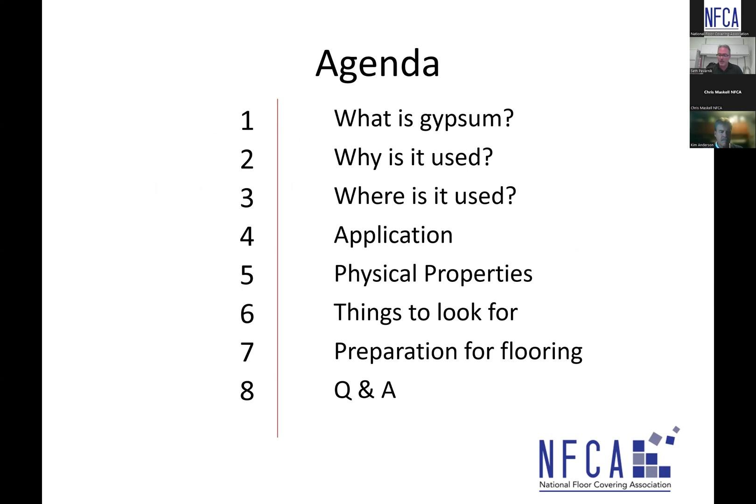And in this presentation, we're going to take a look at gypsum and detail what it is. We'll try not to get too technical there, but we'll also look at why it's used and where it's used. We'll look at the application and then get into its physical properties. Ultimately, things to look for out on site and in preparation for finished flooring, and then we'll wrap things up with a little Q&A session afterwards for anybody that has any questions in relation to what was discussed today.

So to kick things off, what is gypsum? So the chemical name is calcium sulfate. And there's many types of calcium sulfate. So, I mean, if you look on an SDS, a safety data sheet, and you see one of the constituents of a product and it says calcium sulfate, that is gypsum as we know it.

There are different types, and I want to share some of this with you, not to get real technical and have you learn the different types of gypsum that's out there, but it is a true chemistry when it comes down to it. We have calcium sulfate dihydrate. This is natural gypsum. We have calcium sulfate anhydrate. That's also natural gypsum. It's very common for natural gypsum to be found in the earth, typically next to limestone as a part of the reaction that's happening inside the earth.

We have calcium sulfate semihydrate, and this is a little bit different. We're basically creating this by taking standard calcium sulfate, half of a water molecule, and putting it in an autoclave with crazy temperatures, crazy pressures, and humidity to create a different type of gypsum to have different properties.

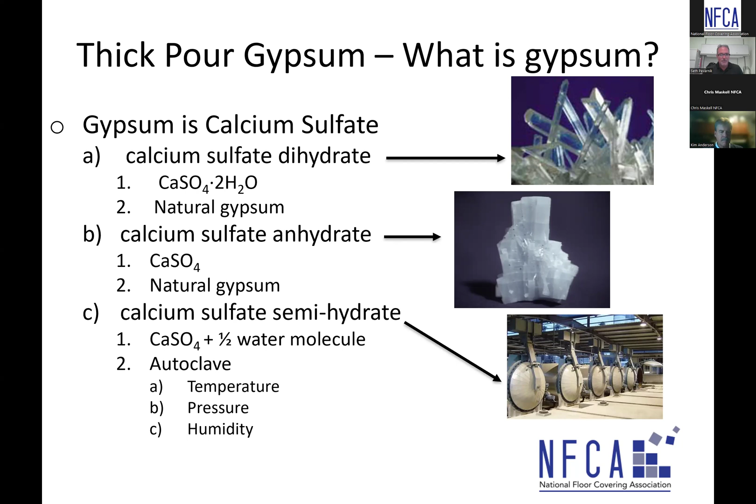And then on the other hand, while those are all natural type gypsum products, we have the synthetic type gypsum products. Could be a function of manufacturing hydrofluoric acid. The calcium sulfate in this process is a byproduct of the manufacturing of hydrofluoric acid. The burning of coal in power plants, flue gas desulfurization, that process, a byproduct of burning coal and the flue gas desulfurization creates a gypsum material. And both of these would be considered synthetic gypsum materials. So a variety of different types of gypsum out there in the industry, from natural, found in the earth, and manufactured, as well as byproduct type materials, as you see here.

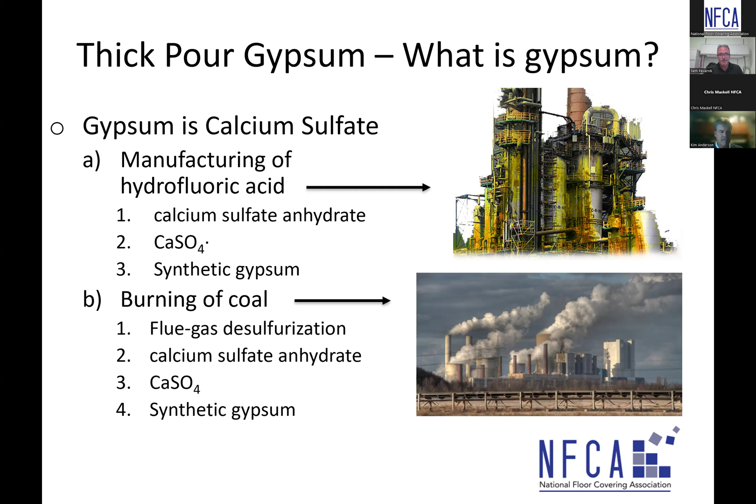So what is gypsum? I mean, the first thing I want to say is it does get a bad rap. Unfortunately, there's been some bad floors that have been poured over the years that don't have very good integrity, and everybody associates gypsum for the most part as being a weak type material. So, in my opinion, it's true that it gets a bad rap. I want to talk to you a little bit about why it gets a bad rap as well.

But a couple of things here. It gets a bad rap, number one, where it's used. Gypsum is supposed to be above grade applications. If it gets used on grade, where we're subject to ground moisture, it can deteriorate and gets a bad rap because of that. How it's used, maybe used outside of its recommendations. You end up having an end result that's not good, used outside of its own specifications, could create a negative result, getting a bad rap.

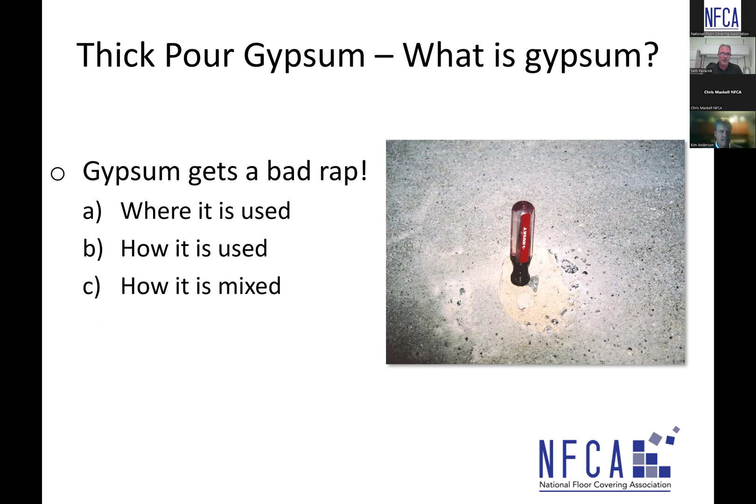And lastly, and most commonly, it's how it's mixed. It can tend to be mixed with too much sand, mixed with too much water, and the end result is a product that may not have good integrity. And also mixed under the wrong indoor environmental conditions.

Very, very good point, Chris. Absolutely. And a lot of water in gypsum - we've got to have good drying properties within the space for installation. And in a lot of cases, it gets installed in the early part of a project and it's open to the outside elements that can be contributing factors as well.

We had a project where propane heat was being used, creating a very moist, humid environment. And the gypsum got poured and the windows were left shut. And the whole thing failed. I'm not an expert in gypsum, but the ingredients separated as a result. Is that how you would see it?

Yeah, it certainly is. And that's one of my talking points here today, one of the biggest causes of issues - it'll be in a future slide - is the GC closing up the building, closing up the area, and all the moisture gets into the air, and you're basically creating a greenhouse effect going on.

We've got to have proper drying happening, and gypsum takes some time to dry. It's typically a week for floor covering, at least from a drying standpoint, and your conditions could mean a longer time than that. That particular case was 50,000 feet, and it was literally just crumbling, chunks of it coming up. Horrible situation.

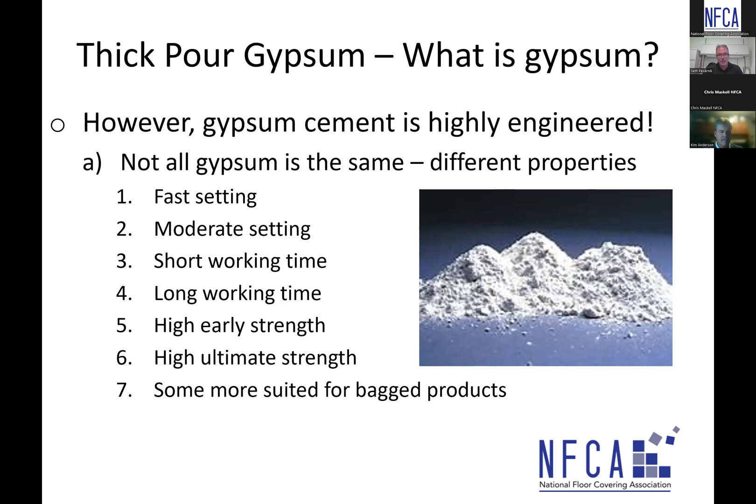So when you really talk to the chemist, the R&D chemist, when they're designing a product, they've got to detail what they want that product to achieve, and then they start with a handful of different types of gypsum materials based on what they need out of that product that they're designing.

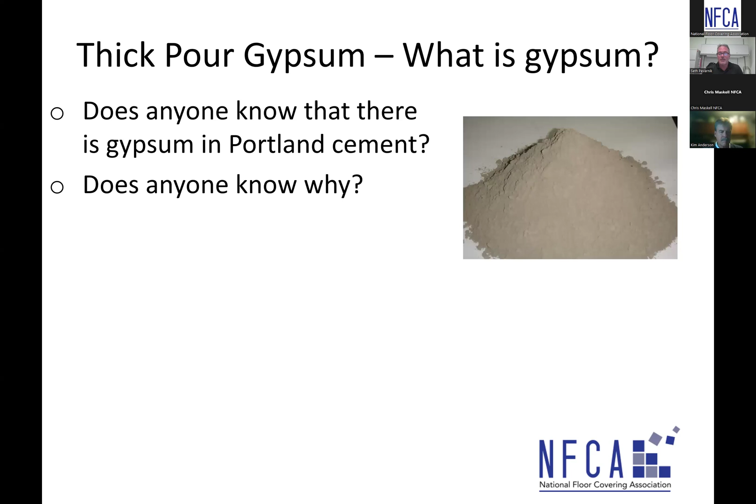Does anybody know that there is gypsum in Portland cement? Well, there is. We do now. And the reason that it's in there is to regulate set. So there's a small amount of gypsum in Portland cement, and it's to help regulate set, make a consistent set.

A little piece of trivia for you guys - gypsum is also a part of hydraulic cement formulation. So the industry definition of hydraulic cement is basically something that is mixed with water, curing chemically, and it has the ability to set underwater.

So your patching and leveling materials out there that are used to prepare floors for finished flooring are qualified as hydraulic cements. I'm not saying you're supposed to use them in underwater applications, but by definition, if they can chemically react and set underwater, then they're called a hydraulic cement.

All these products are hydraulic cements, and it's typical for a small amount of gypsum to be used in these hydraulic cement formulations. You might have a Portland cement material or calcium aluminate cement material as the main binder, and there might be - you look at an SDS and you may see a small amount of calcium sulfate in there. It's not necessarily a filler, but it's a part of the chemistry of the cement.

And that's where the R&D chemists come into play with taking different types of cement and making products. So just because you see calcium sulfate on an SDS, doesn't necessarily mean there's something negative about that product.

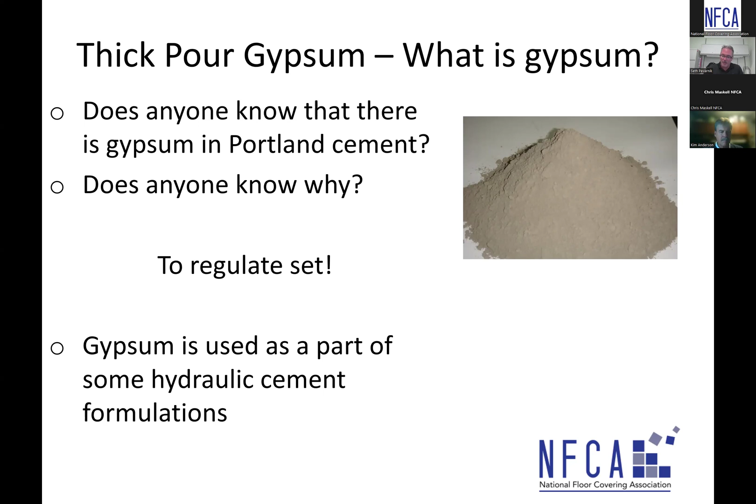So why is thick pour gypsum used? Number one, very commonly fire-rated assemblies. Similar to drywall - in drywall, gypsum wallboard as it's called is basically gypsum in between two pieces of paper. That type of material used on the floor is very good from a fire-rated standpoint.

Seth, what range of dimension is thick pour making reference to?

Like 1.5 to 2 inches? Not very common. Their minimum thickness for these thick pour gypsum products is very commonly 3/4 of an inch, so they will typically test at 3/4 of an inch as part of an assembly because that's their minimum thickness.

Well, the title of this presentation is thick pour gypsum, and thick doesn't quantify anything, does it? So what do you mean by thick? How thick?

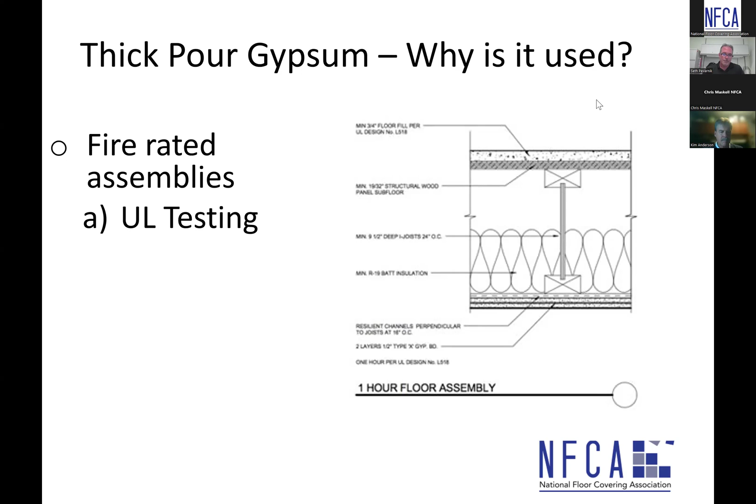Another reason thick pour gypsum is used is for acoustic and thermal insulation - sound reduction. In multi-family housing, a lot of times they have a membrane that goes down on the subfloor first, then an acoustical membrane, and then thick pour gypsum is installed over top at a minimum of 3/4 of an inch or greater. That sheer mass of product, along with the acoustic or thermal insulation membrane underneath, provides added sound and insulation properties.

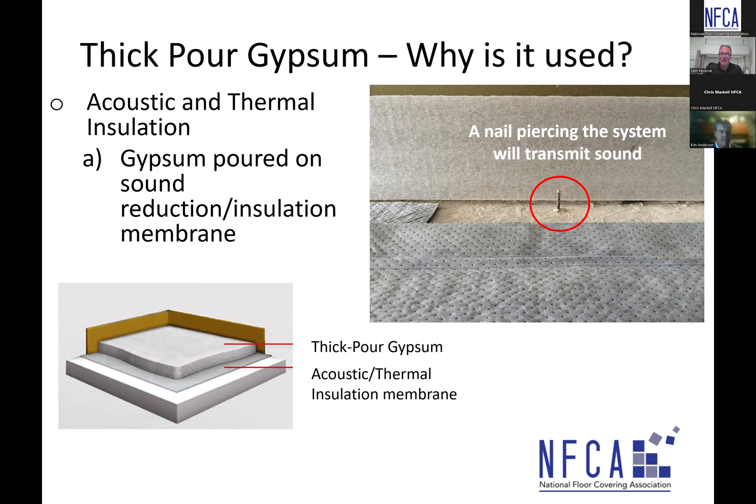Just something to point out here - don't know if anybody saw that in the picture, but this is a picture I found. We had a nail coming through the subfloor that was going to receive a thick pour gypsum application over top of an acoustic membrane. Just wanted to point out that that nail is going to transmit sound very well - not a good thing when it comes to sound.

Another thing thick pour gypsum is used for is in-floor hydronic tubing, where they install hydronic tubing on a wooden subfloor, very commonly - could be concrete, but very commonly wood. In this case, a membrane was installed first, then the hydronic tubing installed to the subfloor and tested, and then the thick pour gypsum is pumped in at a very thick application - thicker than 3/4 of an inch - because you've got to have massive material over top of those hydronic tubes. Another common application of thick pour gypsum.

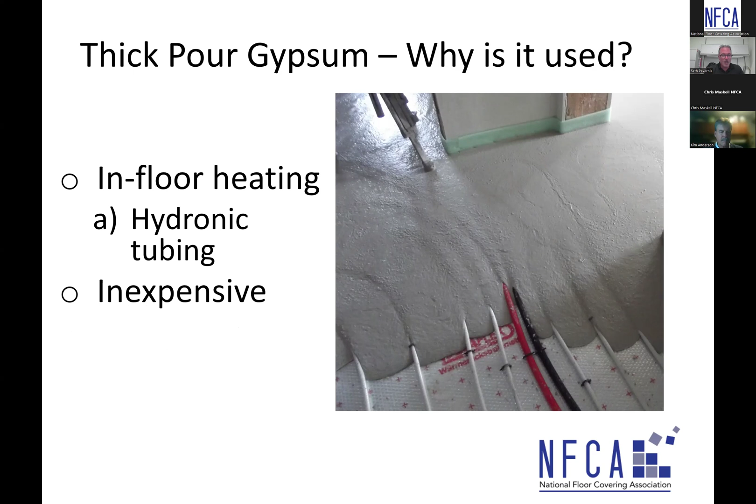Fairly cost effective for that application. Sorry about that, forgot I had that in the slide.

But let's take a look at where thick pour gypsum is used. A majority of the floors poured with thick pour gypsum are multifamily, multi-story living, typically wooden subfloors like you see in the picture. Approximately 70% of those installations are done with thick pour gypsum over wooden subfloor.

Another application you typically see would be precast plank. These planks are made at a manufacturing plant - called hollow core plank because they have hollow cores in the middle - but they're trucked to the job, installed, craned into place. Each plank, after it's dropped into place, typically has some sort of camber problem where one plank doesn't meet up perfectly with the other, and that difference they call camber. It requires some sort of self-leveling to be poured over the whole floor at greater depths to make a flat surface, and thick pour gypsum is one of the applications used for that.

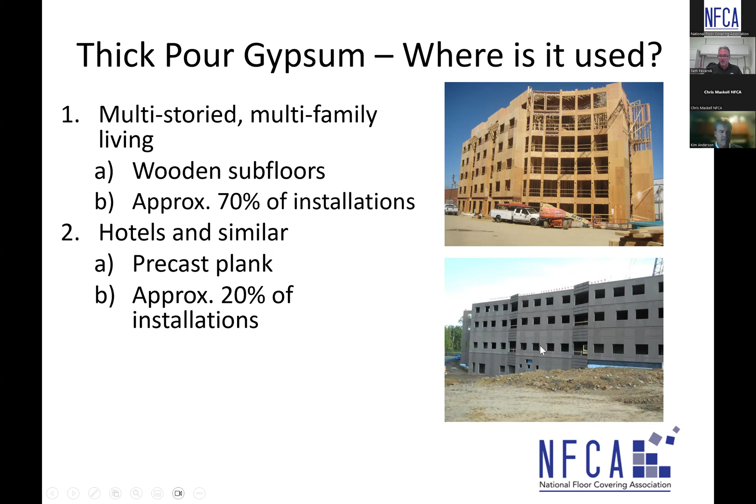Hotel applications use these hollow core planks and similar applications, and that's probably about 20% of the thick pour gypsum installed in North America. The last one would just be concrete and commercial construction, maybe just to round up to get to 100% - we're at about 10% of those installations, just over regular concrete as a leveling material.

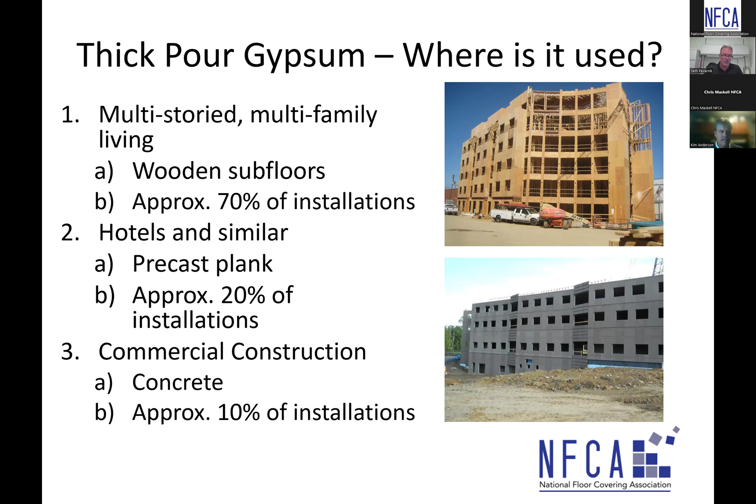So that kind of gives you an idea where they're commonly used, where we commonly see them.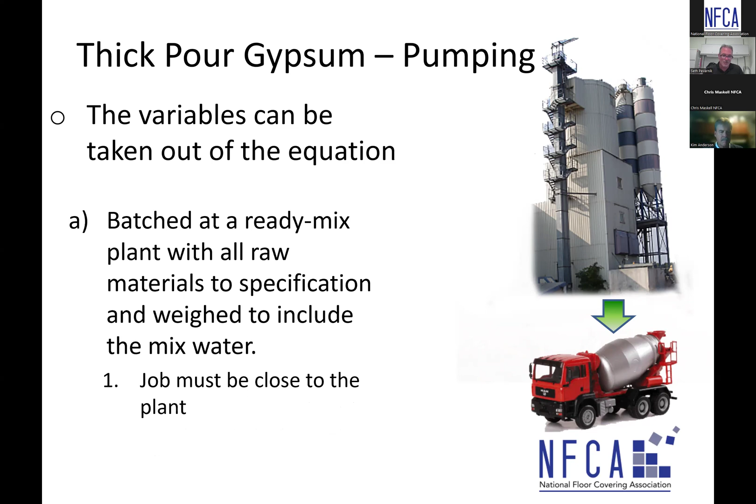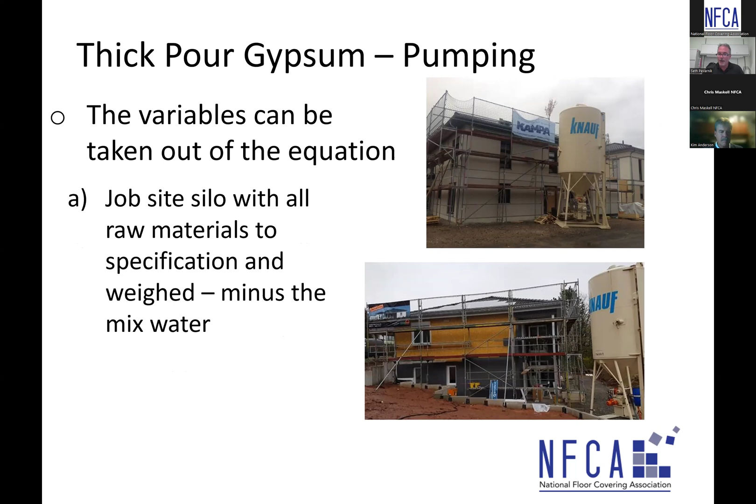So that's one way to take variables out. Another way is an on-site silo with raw materials weighed out to very specific weights, so we get the right ratios, the right amount of gypsum and the right amount of sand. Then that silo of properly blended sand and gypsum is placed into a hopper where the water is added, mixed, and taken to the site. That's another option to take variables out of the equation.

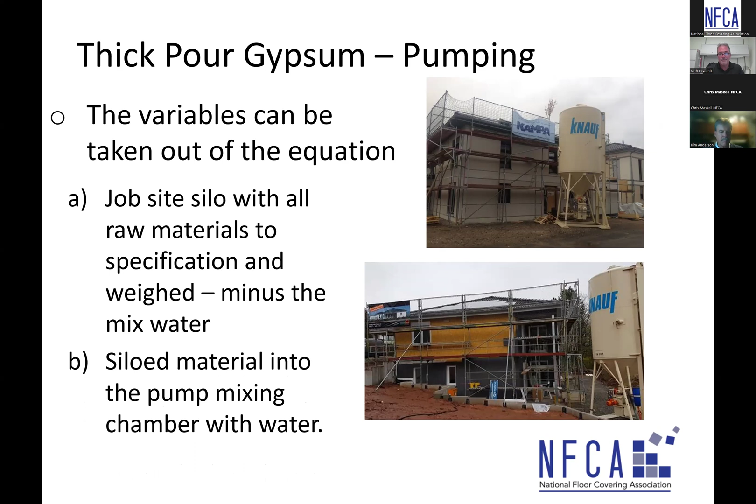A third option for taking variables out of the equation is a very sophisticated pump, and this gets used out on sites. We've seen these where you're putting the right sand into a hopper and the gypsum into a hopper, and the pump itself takes the right amount of sand by weight and the right amount of gypsum by weight and gets that blended together. Then the pump is also metering the right amount of water.

So the gypsum and sand are fed into hoppers in bulk. There's screw feeds and conveyors into the mixing chamber to get the right amount of gypsum and sand. The water is weighed as well, as part of this whole pump process, to give a very specific water amount so that we achieve the right amount of those constituents, giving us a material with very good integrity.

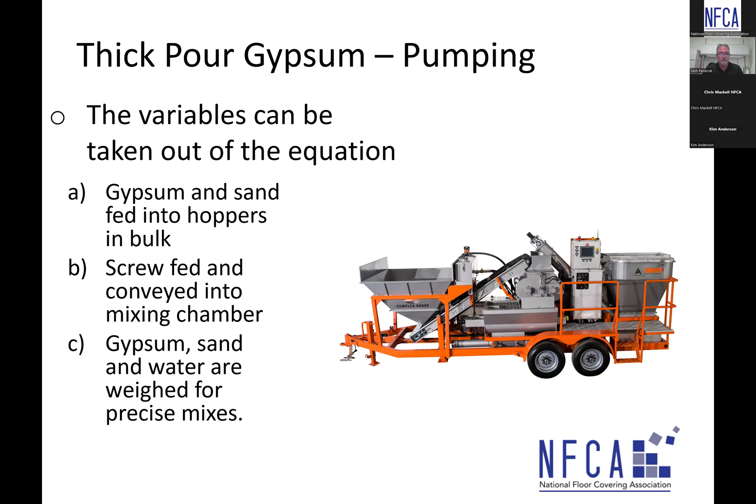Seth, I was just going to ask, does this get you a particular PSI? Yeah, I have some different ratios that we'll talk about in a future slide. Good, appreciate it, that's a good question. And actually it's the next slide, so you were right on the money.

So, mix ratios: very common is a 4-to-1 ratio, sand to gypsum. Sometimes it's 5, 6, or 7-to-1. But unfortunately, by adding more sand, it's more cost effective, but we take away from the strength development because the sand is the filler material in there. The gypsum is the binder that holds everything together, so by putting more sand in, we have less binder. The risk is we lower the strength. We'll talk about compressive strengths and strength properties in a slide coming up as well.

As said earlier, very common minimum thickness—check with the manufacturer—but these thick pour gypsum products are typically poured a minimum of 3/4 of an inch in thickness, and they're typically poured up to 1.5 inches or more, depending on what the site requires.

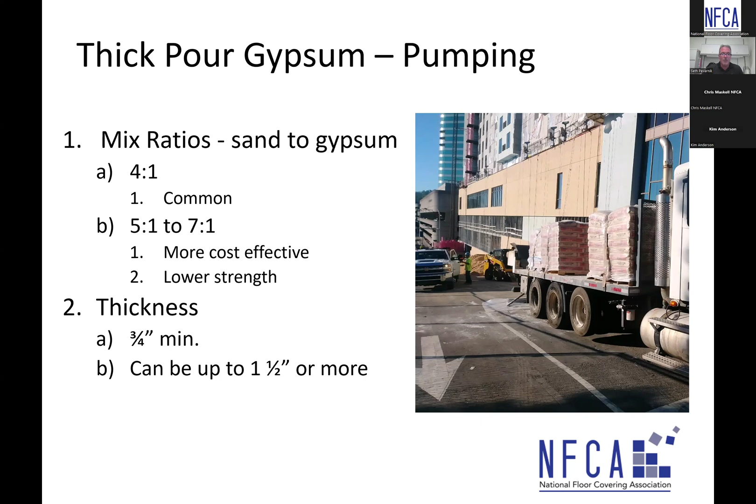So, curing and drying—a term you guys have heard. We all know drying, and that's the evaporation of water. If you old school wash your clothes in a drum and hang them outside on a line to dry, they dry by the water evaporating out. Curing is the chemical reaction between the water and the gypsum, called hydration—that's a chemical reaction. The gypsum molecule and water molecule react together and change into whatever they change into, but that gypsum reacting with the water makes the gypsum develop strength.

Evaporation takes time. It's very common that we need at least 7 days of evaporation before the thick pour gypsum is ready for flooring, but site conditions control how fast or slow drying occurs. It's no different than anything installed on a job site that has water in it—your adhesives that you comb out, maybe a pressure sensitive adhesive that has to go dry to the touch, work the same way. Different site conditions control that: cooler temperatures mean things take longer to dry, warmer temperatures mean things can dry quicker.

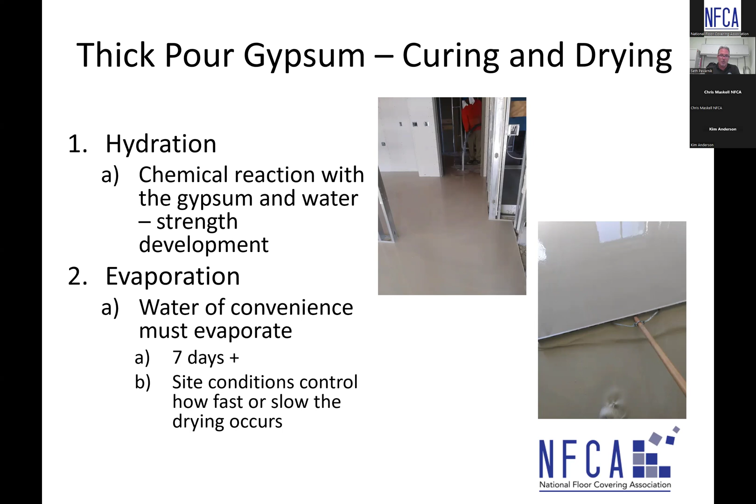So 7 days is a rule of thumb, but I have a plus sign there because it could be more time based on site conditions. It could be more time based on thickness of the gypsum as well.

Thick pour gypsum priming of the surface. Once the thick pour gypsum has been installed, cured, and dried, it's very absorbent, and it may have a little bit of a chalky feel to it.

So it's very common that the manufacturers have a primer that goes on the floor first. As you see in the picture there, these are low solids acrylics or low solid latex materials, they could be around the 10% solids, something like that. But you'd have to check with the manufacturers.

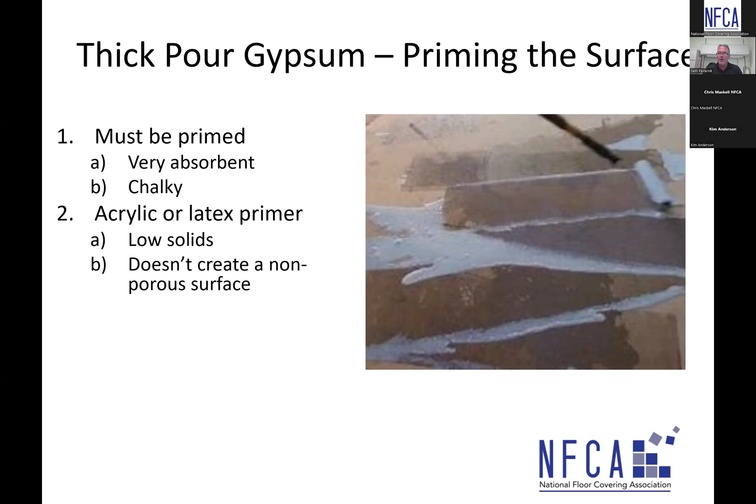The point I want to make, though, is that these low solids acrylics or latexes like this don't create a non-porous surface. They're basically being applied to the surface to equal out the absorbency of the gypsum, to allow sufficient open time of your flooring adhesive, especially for the wet set or semi-wet set materials. It's so that the gypsum doesn't draw the moisture out of the adhesive, and you have ample working time with the adhesive. So it's very, very common for a primer to be installed once the gypsum is cured and dry.

One thing that's very common as well: typically the GC or the flooring contractor applies the primer. The gypsum contractor - I'm not saying this is every case, but it's pretty common - will install the gypsum. You've got a week plus for that to be dry for flooring, and they typically don't come back out just to put a primer down. So they leave primer behind. They provide strict instructions and guidance on how to apply it. From my experience, it was common for the GC or the flooring contractor to apply the primer.

I'm not sure specifically up in the Canadian market, but some of you guys there might be able to weigh in on that, if that's true up in the Canadian market as well.

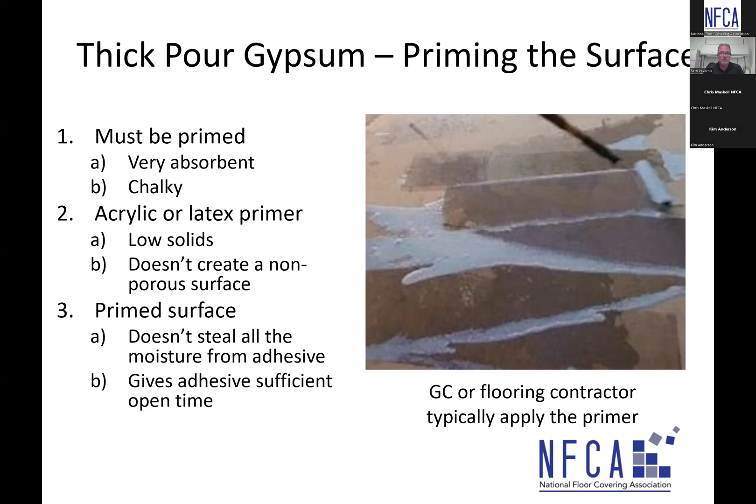General contractor. Got a question - if gypsum can be poured so you do not need a primer, is that correct? The thick pour gypsums are very common, and it's very common to have a primer. The engineered gypsums that we'll talk about here in a little bit, some of them require a primer, others may not. But the thick pour gypsums, the 3/4 inch and thicker products, typically do require a primer.

And a water droplet test would be what you would apply to determine whether you've got acceptable absorbency or not. Absolutely, we'd do the 3191 water droplet test - I believe I refer to that in a future slide. Or bond tests - yeah, you can certainly do a mat bond test, 3311, afterwards too. That tells the truth. Yep, absolutely, and I think I mentioned that in a future slide as well. So it's the flooring contractor's responsibility to do the bond test, but not apply the primer.

Back to the physical properties of the gypsum: the 4-to-1 ratio, 4 parts sand, 1 part gypsum, very commonly yields, when mixed with the correct amount of water and at that correct ratio, a 2,000-pound compressive strength value. Certainly if they're doing a 5-to-1, 6-to-1, 7-to-1, which tends to be more cost effective because the sand is less expensive, the end result may be lower strength values. But the thing I want to point out is that even though generally a 4-to-1 yields 2,000 compressive strength, there are different products that manufacturers have out there in different ratios that can achieve 2,500, 3,500, even 4,500 psi compressive strength gypsum.

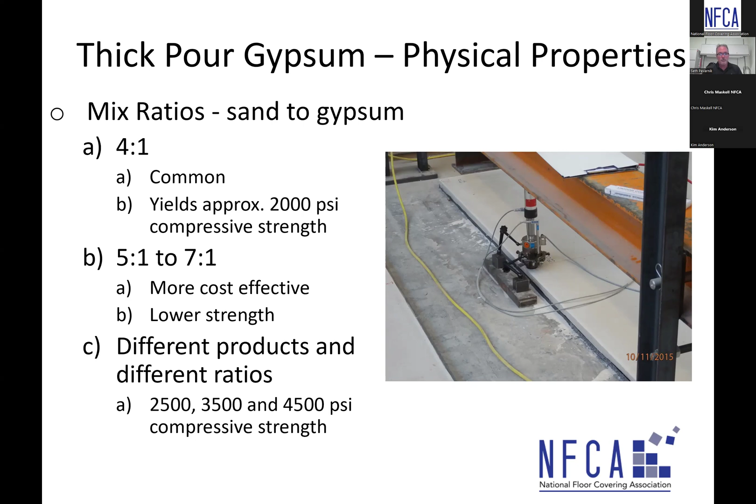So while generally speaking, in the past, the 4-to-1 was very common - the typical gyp that you see out there, and it still may be so present day - there are other products out there that can be used on site as well that arrive at higher compressive strengths due to their mix design and ratios. So I just wanted to point that out. Minimum flooring standards for resilient are 3,500 psi. Yes, for ASTM F710. It's 3,000 psi, yes, for ASTM F710.

Ironically, the gypsum standard, which is also built by the same F06 committee, F2419, for gyp over concrete, details 3,000 psi. And in that standard, gypsum compression strength over a wooden subfloor is detailed at 2,000 psi. But F710, which is the standard for preparing concrete to receive resilient flooring, also says 3,000 psi.

Good to know. I think NFCA's got 3,500. Yeah, so we may have to look at that as a group. And different floor covering manufacturers may have different requirements as well.

Well, we're quoting, perform in accordance with F710. If we're saying that, then we should align with that standard. We do on other issues within that standard. So I think we should take a look at that behind the scenes here. Sounds good.

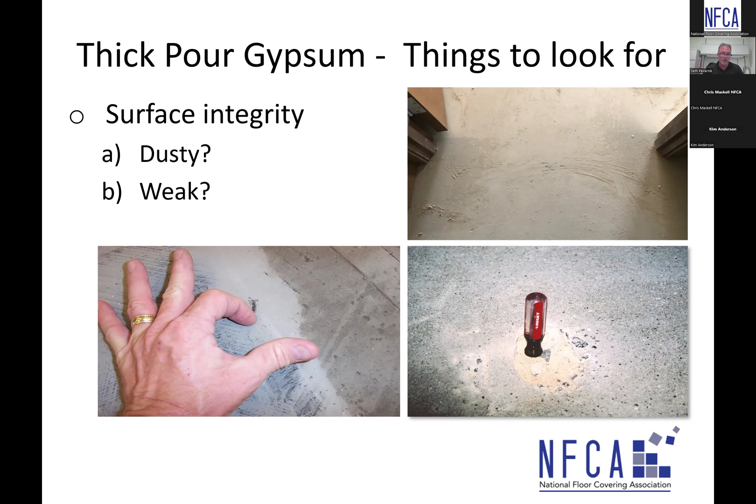Is there not a standard for gypsum in terms of this is the minimum it should ever be? A minimum for what? PSI. Yeah, the gypsum standard. Because I don't know where you'd use 2000, that just seems shy. I'm not going to disagree with you, but that's the ASTM 2419, the standard practice for installation of thick poured gypsum.

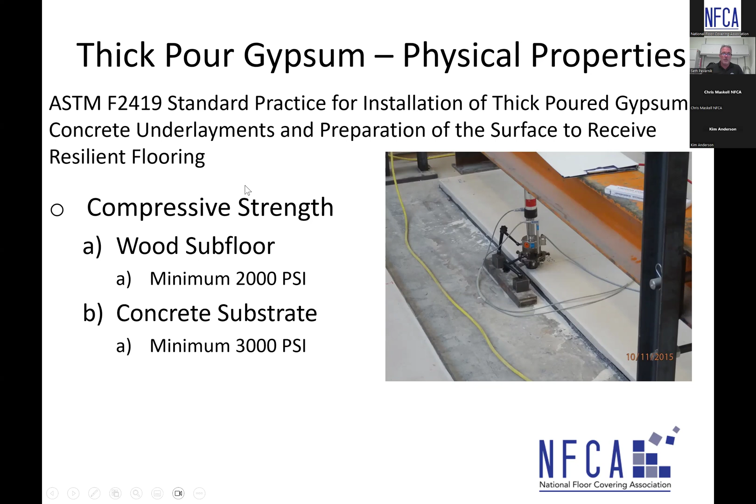But there are other gypsum materials that achieve higher than those compressive ratings too. It depends on what was installed on the project.

Yeah, unfortunately, what happens is you get, especially if they're design build, a general contractor talking to a gypsum installation company, and well, where can you save me some money? But nobody's talking to the flooring people so that they can better understand what they're attempting, and give them some basic knowledge as to where to not proceed and where to proceed.

And we run into that, boy, let me tell you, it can run into the hundreds of thousands of dollars. I don't disagree. I've seen a lot of weak material that did not have to be weak. It was installation related situation.

And I can tell you that the gypsum that is manufactured is an engineered material, and with the right amount of water and with the proper sand and right amount of sand, can achieve the published strength values of that product. But too often we see, not on an everyday basis, but we do see things get overwatered on site, or too much sand, things like that.

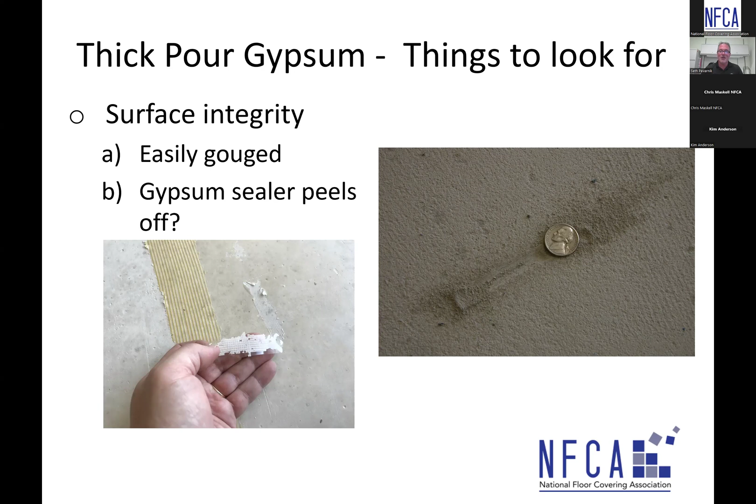Things to look for: can't get the gypsum to dry out. It's like, come on, what are we doing with a torch? But we really got to look at site conditions. And I touched on this a little earlier. Drying depends on your temperature, humidity, and airflow. That's the three things, regardless of what material it is.

If it's a flooring adhesive that has to go dry to the touch for a pressure sensitive install, the drying of that flooring adhesive depends on temperature, humidity, and airflow. And with gypsum that has a lot of water in it, while there is chemistry and hydration that happens, that water has to evaporate out. And to get it to dry, we have to have good temperature, good ambient humidity, and good airflow.

If we're sitting at cooler temperatures and high humidity and no airflow, nothing's going to dry. And that unfortunately happens on site because we don't have good conditions. To confirm dryness, an industry standard is ASTM D4263.

And I'm not saying that this is a suitable test for on concrete that's on ground to validate putting flooring down, but from an evaluation to see if a specific product is dry, it's suitable for that.

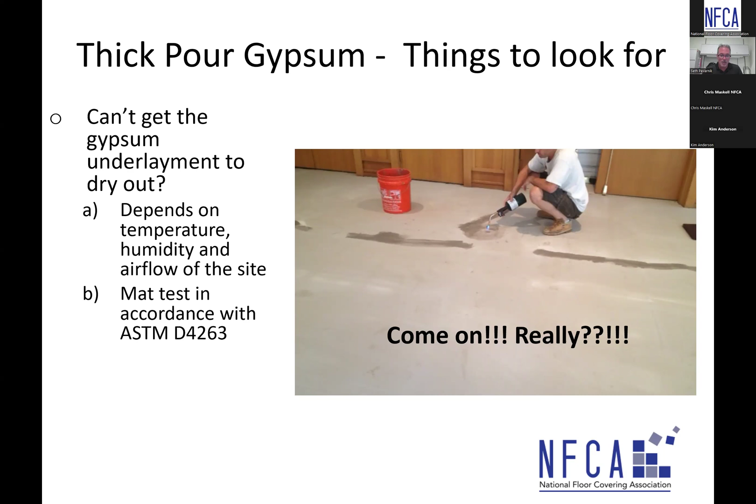So mat testing, basically throwing a piece of plastic down 24 by 24, letting it go 24 hours, making sure we don't have a dark spot underneath there. And that's only for mixed water. I'm not talking substrate moisture whatsoever. This is only mixed water that I'm referencing here.

And I mentioned this a little earlier too. One of the huge problems is the GC closing up the building after they pour, and they basically create a greenhouse effect, and you basically get to 100% humidity, and it's probably raining. You got water going down the windows and raining from the moisture that's collecting on the ceiling, for that matter. So we can't close the building up. We gotta have good airflow going. Good temperatures are critical as well.

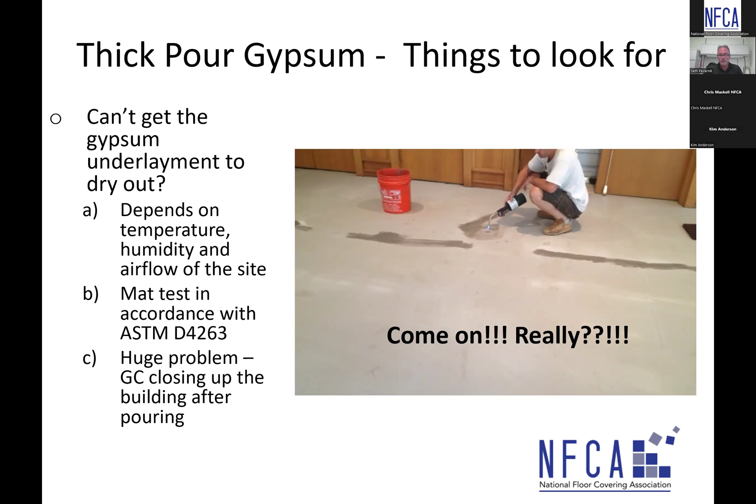Another thing to look for, maybe it's a renovation and you're coming in and finding just a mud cracked gypsum floor. In some cases, it's best just to shovel everything out and start all over again. We've seen that before. So you gotta do your evaluation to see what kind of integrity we're looking at.

To give you an idea of overwatering, this is an easy way to do a physical evaluation of any of these type products, whether it's a thick pour gypsum material or a self-leveling underlayment material, pick a manufacturer. These liquid materials, I say liquid because they're very flowable during placement, and then they chemically cure to develop strength. The idea is having the right amount of water to make the material flowable, but not too much water to cause phase separation.

Phase separation is what we're seeing in this picture, where all the heavy materials like the sand fall to the bottom and all the lighter materials float to the top, and we're left with a very weak surface. This is a cross section of a thick pour gypsum that was, quite frankly, simply overwatered. The sand aggregate fell out of suspension, so it's down at the bottom, and you have no aggregate at the top, and you have a really weak surface.

Now, if you remove that weak surface, you get down to the sand and the cement, you'll get to a hard surface. But looking at this picture, if it was hypothetically 3/4 of an inch thick, then we need to remove 1/4 of an inch to start to get down to the hard stuff.

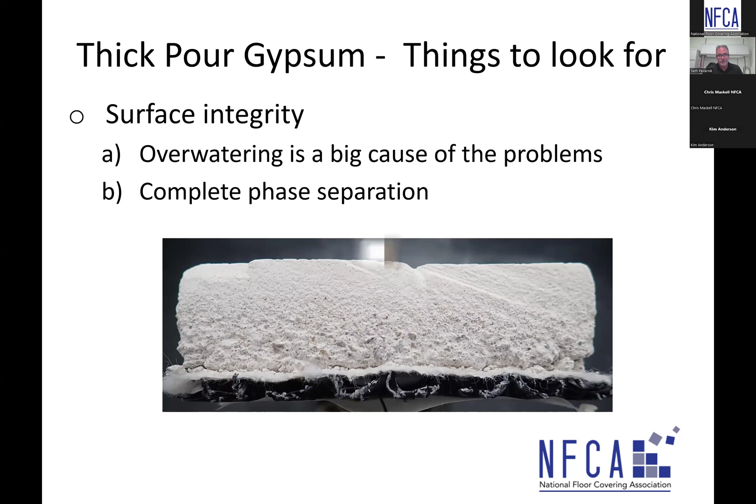We mentioned this earlier, somebody brought it up. A great practice, not just on thick pour gypsum, but really on any project, whether you're going over concrete, over patching material, leveling material, or thick pour gypsum - most all of your flooring manufacturers will recommend conducting mat bond tests.

We built an ASTM standard and released it a couple years back, ASTM F3311. Basically what you're doing here is taking a 2x2 piece of flooring and adhering it, preparing the substrate, whatever it might be, combing out adhesive in accordance with manufacturer's recommendations, appropriate open time in accordance with manufacturer's recommendations, dropping the flooring in, rolling it with a 100-pound roller, taping the entire perimeter, letting it go for at least 72 hours.

Then you come back and cut a 2-inch strip. You take a putty knife and get underneath the flooring to separate the bond, then you grab the flooring with your finger or maybe a pair of pliers, and you slowly and evenly pull it directly towards the ceiling at as best of a 90-degree angle to the substrate as possible. I know it's tough, but you slowly pull that up very consistently at a very equal, slow speed, pulling it directly up towards the ceiling, and then you evaluate the mode of failure.

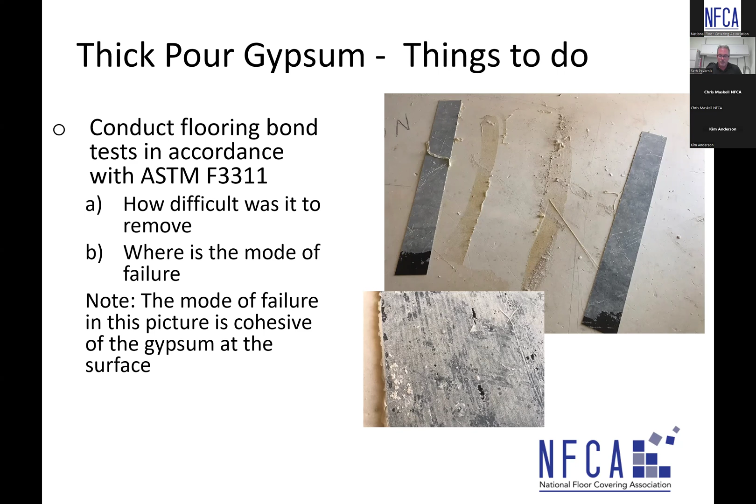So here's an example of the flooring mat bond test that was difficult to remove. And we're seeing cohesive failure within the adhesive. Sometimes you get a little bit of the gypsum, but the point being here, this was gypsum that was poured correctly. It was dry, it was properly primed, and we saw a very good result, the flooring being extremely difficult to remove.

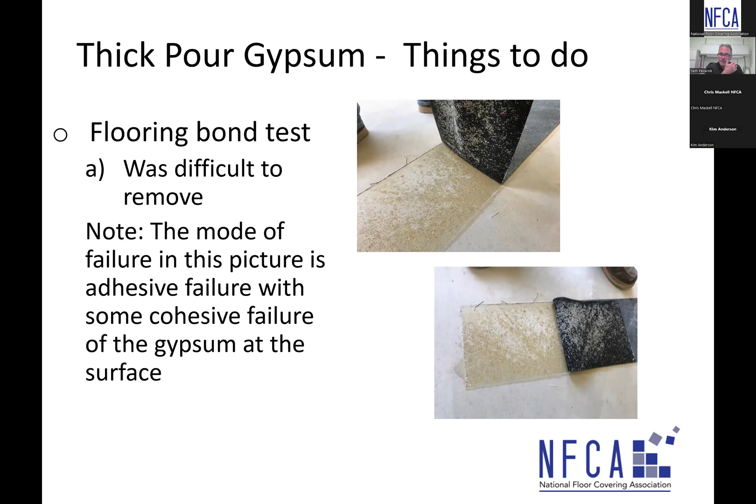And it's very subjective. Yeah, unfortunately it is. That's another excellent point. There's no way to quantify that. You have to have your hand calibrated every time you do the test to make sure you're pulling directly to the ceiling at a very slow and equal rate. I'm joking about calibrating your hand. The point being, though, this type of test is subjective because it's almost how strong is the person that's doing the test? Is he pulling it the same rate as somebody else?

It's a tough one, trying to figure out ways to quantify this. Could you do some sort of fish scale that gives you values? I don't know, but you got to see videos. You got to see videos of where there's failure, where it's easy, and then you got to see videos where it's medium, and then you got to see videos where it's difficult. And once you see a number of them, it's an aha, because it'd be like removing carpet tile. If it removes that easy, it's easy. It's a failure on, say, resilient flooring.

Yeah, and the other thing I'll add to that, it's an excellent point. Get comfortable with doing the test directly over concrete. Get comfortable with doing the test over patching and leveling materials because you can't compare one to the other. Concrete's a structural material, typically steel trowel. The surface is super hard to the point where you're not going to pull the concrete apart. Even with your high performance adhesives like your two-component epoxies, two-component urethanes, compared to patching and leveling materials, they're just different materials. And it's still difficult to remove, but it's going to be different than doing the pull on concrete. So get comfortable with doing multiple pulls on concrete and what to expect, and get comfortable with doing pulls on patching and leveling materials so you know what to expect because it's different.

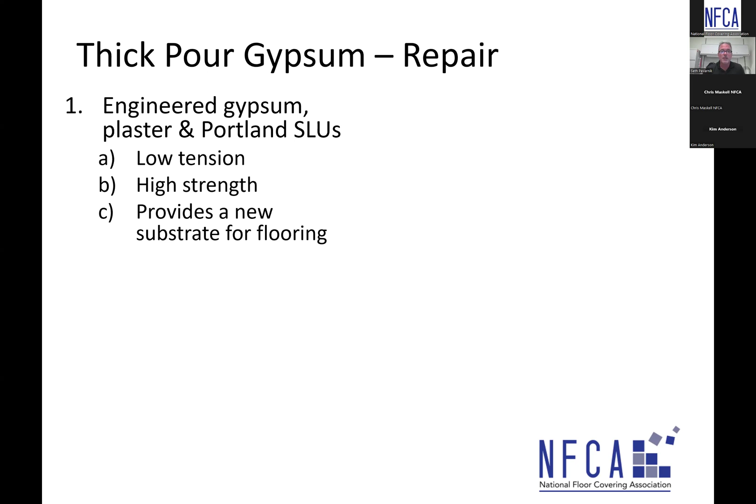So once we do our evaluations, there are repairs that are certainly doable out there from a self-leveling and a patching standpoint. There are engineered gypsum plaster Portland self-leveling products that are designed specifically to repair the thick pour gypsum materials. They're low tension materials. They're very high strength, compressive strengths up around 6,000, and it provides new substrate to put flooring down.

Skim coating products, you may see in data sheets that the skim coating product could be used over a gypsum material, but I want you to keep a couple things in mind here. Number one, the skim coating products, they're low tension because they're applied very thin, and you don't have enough material there to really cure and create any tension. But the thing that I want you to keep in mind here is that we are only putting a skim coat down. We're only putting enough material to give the new adhesive something with good integrity to adhere to.

Okay, we haven't changed the fact that a weaker material may lie below, and you've got to take into account any type of point load indentation that could occur, rolling loads, which would equate to rutting. Different than if you're pouring a self-leveling quarter inch over the whole floor. Now we've got a quarter inch hard shell material over a thick pour gypsum that may not have the strength needed for the installation. So having that quarter inch hard shell allows everything to perform. Having a skim coat could still be subjected to point load indentation and rolling load rutting. Does that make sense?

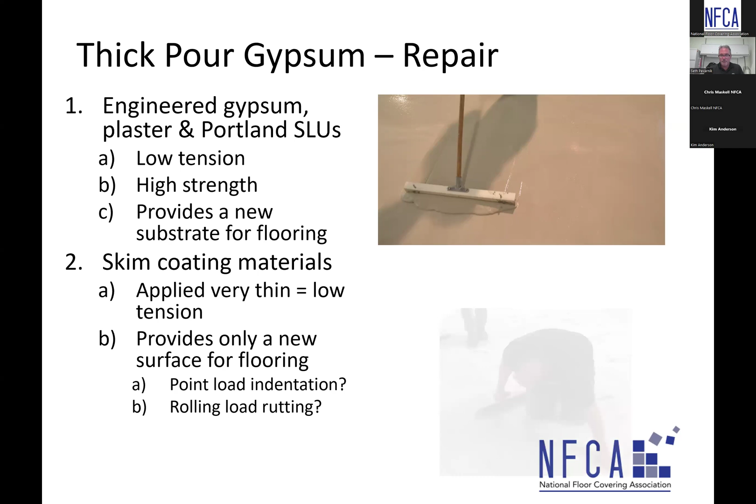When we're installing patching or leveling materials over gypsum, double priming is very common with an acrylic primer. This helps consolidate the surface and acts as a sealer so the gypsum isn't sucking water out of the patch or leveling material.

Without getting too technical, it creates an isolation layer if a Portland cement product is used on top. Portland cement itself has a little bit of gypsum to help regulate set, but if we have a pure gypsum material and a pure Portland cement material interfaced with each other, the chemical reaction of the Portland cement with water can have an adverse reaction with the existing gypsum and create what they call ettringite.

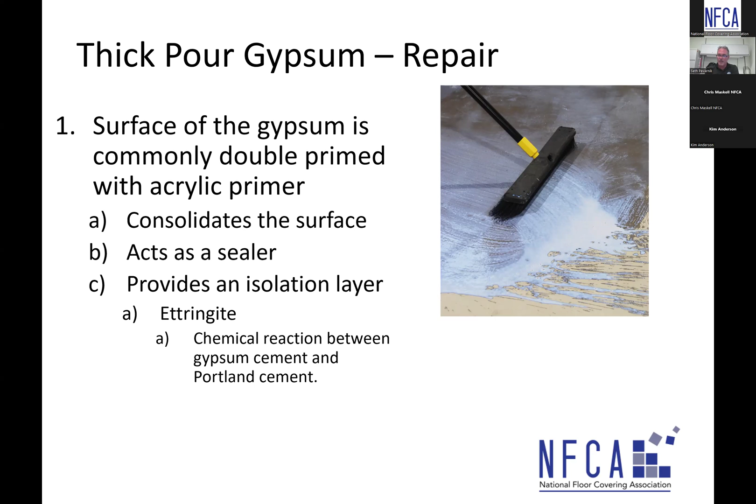This creates a bit of stress right at the surface that can cause failure. So it's very critical to have a double prime with an acrylic type primer that creates that isolation layer between the new patching or leveling material and the existing gypsum. But check with your manufacturers on their recommendations. I just wanted to point that out to everybody.

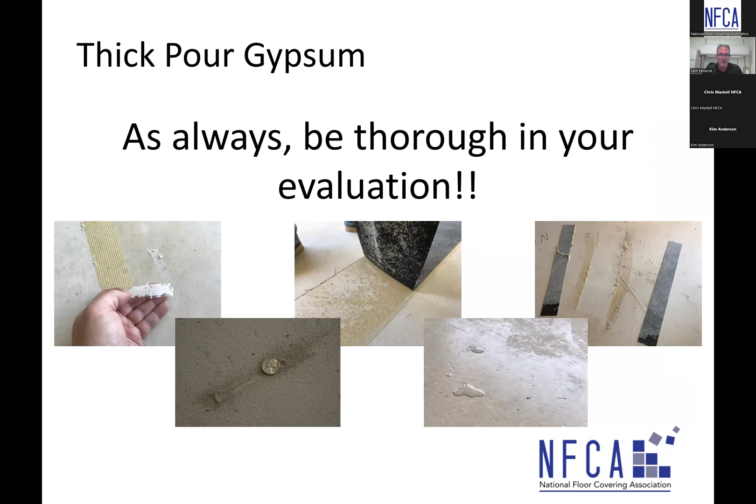Bottom line here, couple things. Thick pour gypsum is an engineered material, and when done right, it reaches the design properties of the product. But all too often we may not necessarily see that on site, and it ends up being an installation-related situation. So just be thorough with your evaluation, as you do when going over concrete or patching or leveling materials. That's the bottom line here - be thorough with the evaluation with everything we talked about.

Great, thank you Seth. Got a couple questions here for you. This is from Andrew Weeb: Do gypsum subfloors deteriorate if exposed to moisture years after installation? They've had a few insurance replacements due to plumbing leaks, etc., where the gypsum became extremely brittle and required replacement, even though it seemed good at the original installation a number of years previously.

Yeah, they certainly can. It's kind of like gypsum drywall too - it's doing fine for years until you get a flood, and it gets wet with water and can soften and things start to grow on it. So yeah, that broken pipe can cause issues. I would expect a softening. When it dries out it could make it a little bit brittle as well, but it certainly can be affected by water.

Primer doesn't help? Primer can help - if we had enough primer that would stop the gypsum from getting wet, yes. But if there was a leak that we knew happened, and the gypsum was performing for years, and now we have these issues, what I would do is get the manufacturer involved and let them weigh in on what to do from a next step standpoint. I guess assume that your gypsum will have changed and might need replacement where the flood occurred. Very possible, yep.